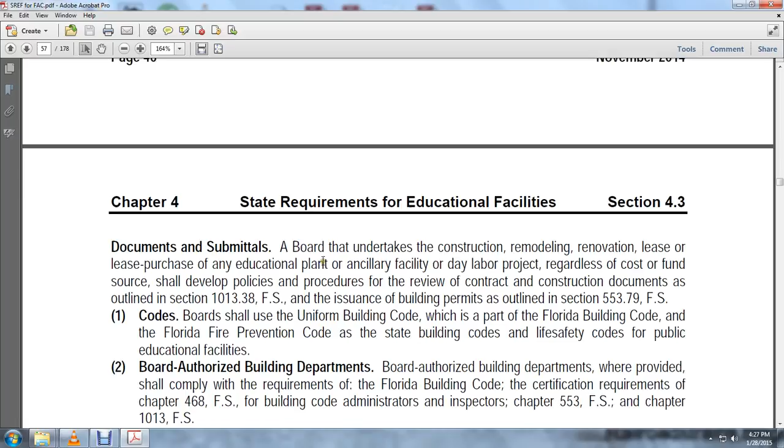Review by local fire authority. The site plan of new construction additions exceeding 2,500 square feet shall be submitted to the local county, municipality or independent fire control district for compliance review of fire department access roads, fire protection system connection locations, and fire hydrant spacing.

The site plan shall be deemed approved unless the local fire authority submits to the board's fire official a written list of deficiencies within 15 days after receipt of the site plan. Upon reasonable request from the local fire authority, the board shall provide reasonable access to all construction documents.

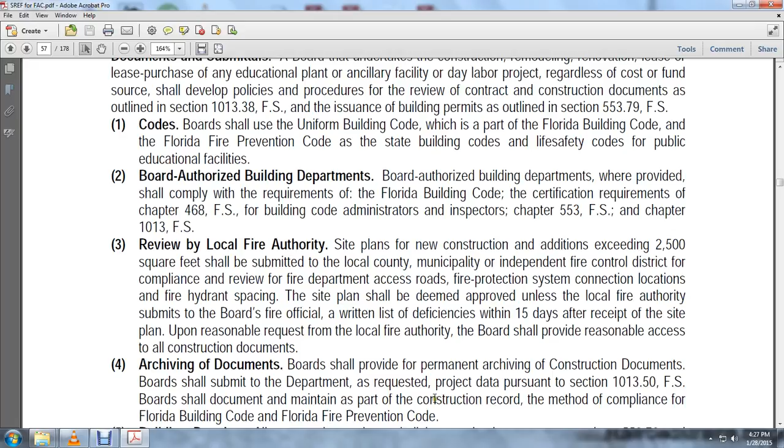Archiving the documents: the board shall provide for permanent archiving. The construction documents shall be submitted to the department as requested project data pursuant to Section 1013.50, Florida State Statutes. The board shall document and maintain, as part of the construction record, the method of compliance with the Florida Building Code and Florida Fire Prevention Code.

Building permits: all construction projects shall be permitted pursuant to Sections 553.79 and 553.80, Florida State Statutes. If the board requests the building permit from the office, the board shall comply with the following criteria. The board's designated certified fire safety inspector shall review and approve the Phase 3 construction documentation.

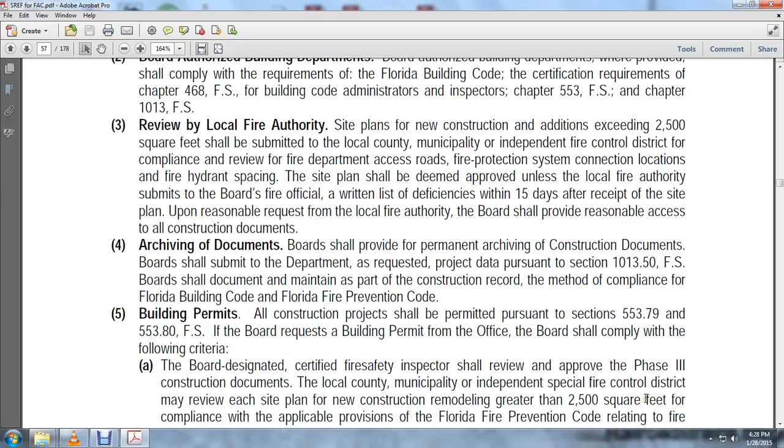The local county, municipal, or independent special fire control district may review each site plan for new construction or remodeling greater than 2,500 square feet for compliance with applicable provisions of the Florida Fire Prevention Code relating to fire department access roads, fire protection system connection locations, and fire hydrant spacing. All mandatory items cited in the Phase 3 review letter shall be corrected.

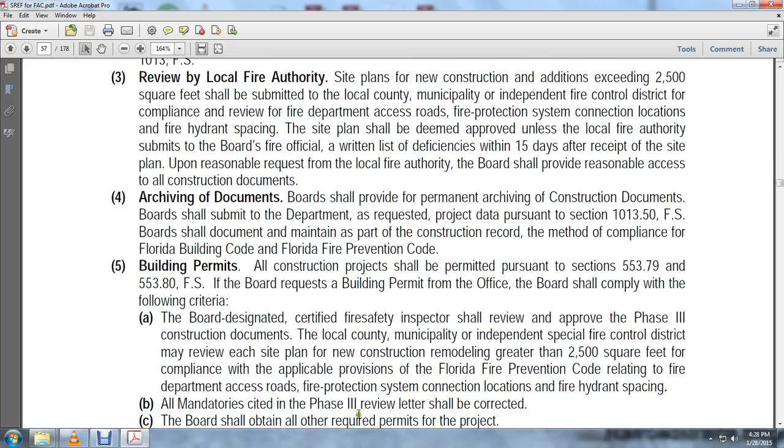The board shall obtain all other required permits for the project. The board shall verify that the contractor meets all insurance requirements and that the contractor's license is current. The board shall electronically transmit to the office, via EFIS, a completed building permit application, OEF Form 220.

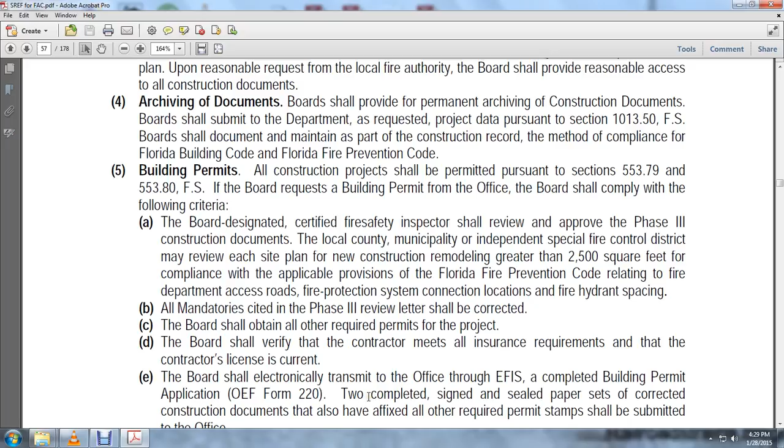Two completed, signed, and sealed paper sets of the corrected construction documentation, that also have affixed all other required permit stamps, shall be submitted to the office.

Upon receipt of the documents, verification that all mandatories have been satisfied and verification that the contractor's license is current, the office will issue the building permit.

Upon receipt of the documents, with verification that all mandatories have been satisfied and that the contractor's license is current, the office will issue the building permit, OEF Form 225.

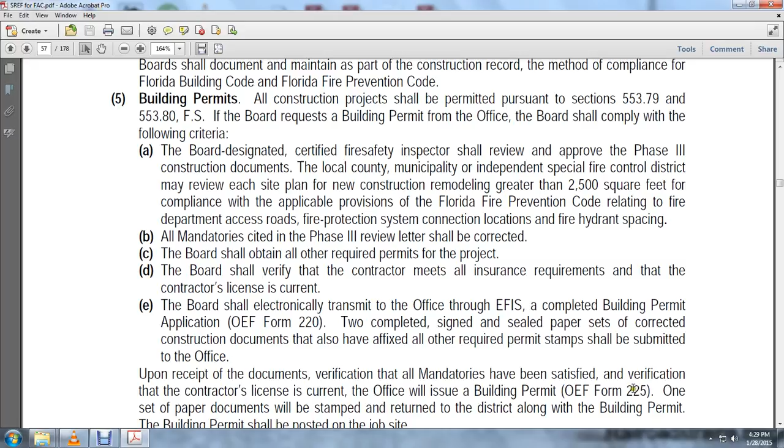One set of the stamped paper documents will be returned to the district along with the building permit. The building permit shall be posted on the job site.

Annual maintenance permit, pursuant to Section 553.80(6)(d), Florida State Statutes. The board may use an annual maintenance permit to facilitate routine maintenance work.

If the board wishes to obtain an annual maintenance permit from the office that is issuing building permits to the board, the board shall submit to the office a written request that includes a description of how the board enforces the requirements of the state, the Florida Building Code, and the Florida Fire Prevention Code for projects under the annual maintenance permit. The description must name the entity that will perform all required inspections.

The description must also explain how each project will be documented and tracked for code compliance. Upon receipt of the above information, the annual maintenance permit, OEF Form 226, will be issued to the board.

Review by office: the board may submit construction documentation to the office for review as prescribed in this section. This applies to new construction, remodeling, or renovation, regardless of the estimated project cost. Documentation for the project submitted to the office for review shall conform to the appropriate sections of the requirements of educational facilities.

Delegation of authority: pursuant to Section 1013.371(1)(c) of the Florida State Statutes, a board is authorized to adopt policies and procedures delegating authority to a superintendent or president for submitting documentation to the office for review and approval, subsequent to and consistent with the board's approved scope, time frame, funding source, and budget of the project.

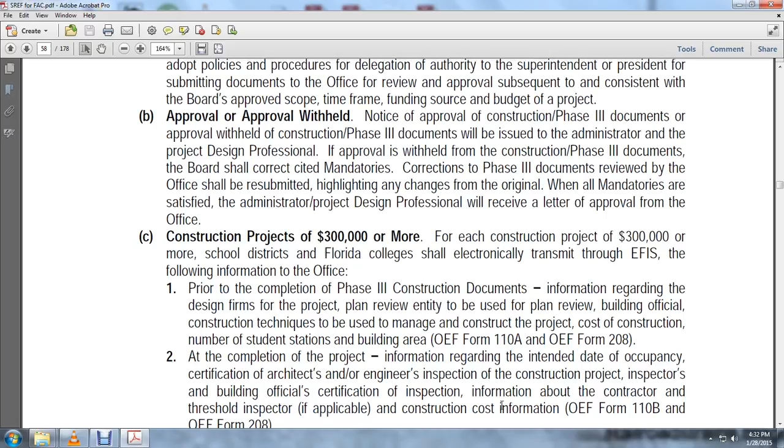At completion of the project: information regarding the intended date of occupancy certification, the architect's or engineer's inspection of the construction project, the inspector's or building official's certification of inspection, information about the contractor and threshold inspector if applicable, and construction cost information on OEF Form 110B and OEF Form 208.

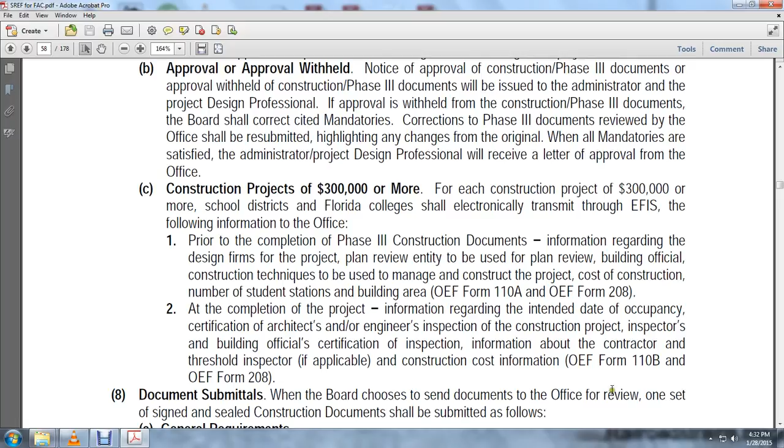Document submittals: when the board chooses to send documents to the office for review, one set of signed, sealed construction documents shall be submitted as follows.

General requirements: the letter of transmittal, OEF Form 208, and the construction documents for review shall be electronically transmitted to the office via EFIS.

Record set of signed, sealed construction documents, with statements of compliance. Only complete construction documentation signed and sealed by the design professional, in accordance with the Board of Architecture or the Professional Engineering Board, will be accepted for review.

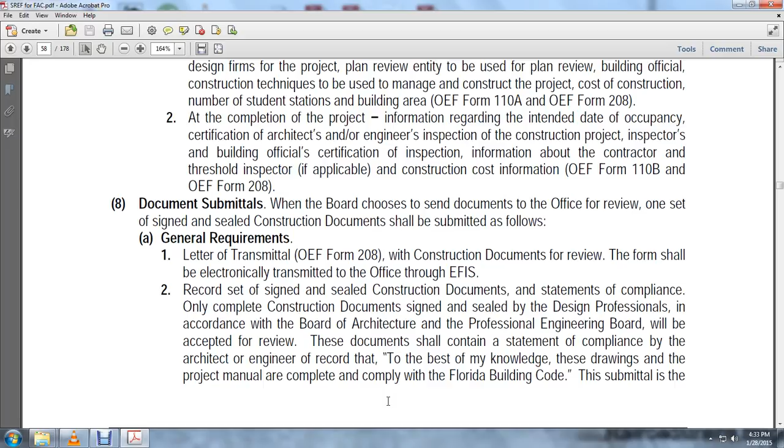These documents shall contain a statement of compliance from the architect or engineer of record, stating that to the best of their knowledge these drawings and the project manual are complete and comply with the Florida Building Code.

This submittal is the office's record set of the bid documents, which will be permanently archived by the office for the benefit of future boards.

Engineering calculations for mechanical, electrical, and structural systems: when requested by the office, the engineering calculations shall be submitted separately from the drawings and project manual.

The life cycle cost analysis: OEF Form LCCA documents, data summary sheets 1, 2, and 3. The LCCA life cycle cost analysis shall be electronically signed and electronically transmitted to the office via EFIS for review and approval.

Florida Energy Efficiency Code for Building Construction, FEEC, Chapter 13 of the Florida Building Code compliance forms.

Submit one copy of the Florida Energy Efficiency Code compliance forms, signed and sealed by the State of Florida registered design professional, including calculations for mechanical systems documentation, energy efficiency ratio rating, HVAC equipment, electrical systems, insulation, and building envelope, to the office, along with facilities space chart/net and gross square footage.

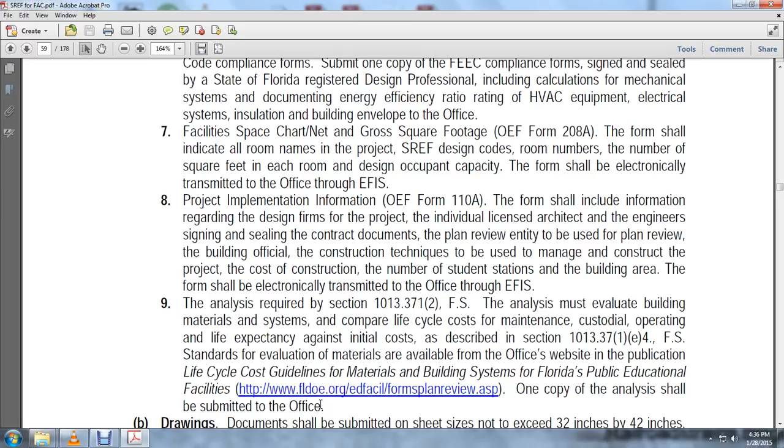One copy of the analysis should be submitted to the office. The drawing documents should be submitted on sheet sizes not exceeding 32 inches by 42 inches.

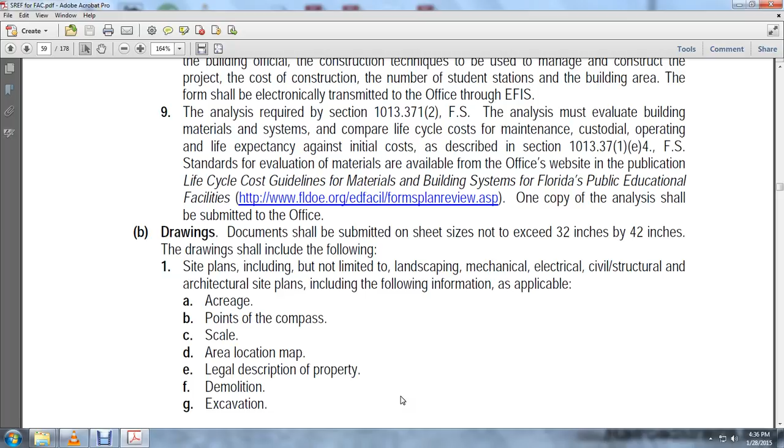The drawings shall include the following site plans, including but not limited to landscaping, mechanical, electrical, civil, structural, and architectural site plans, including the following information as applicable: acreage, point of compass, scale of the area, location map, legal description, property lines, demolition, excavation, utilities, finish grade, contours, general topographical conditions, flood zone, and floodplain elevation.

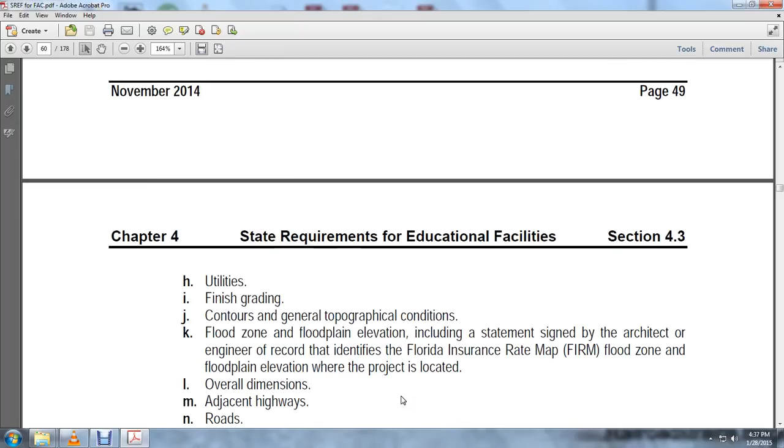This should include a statement signed by the architect or engineer, identifies the Florida insurance rate map, flood zone, and floodplain elevation where the project is located.

L, the overall dimensions. M, the adjacent highways and roads. O, the emergency access. P, the emergency fire hydrants.

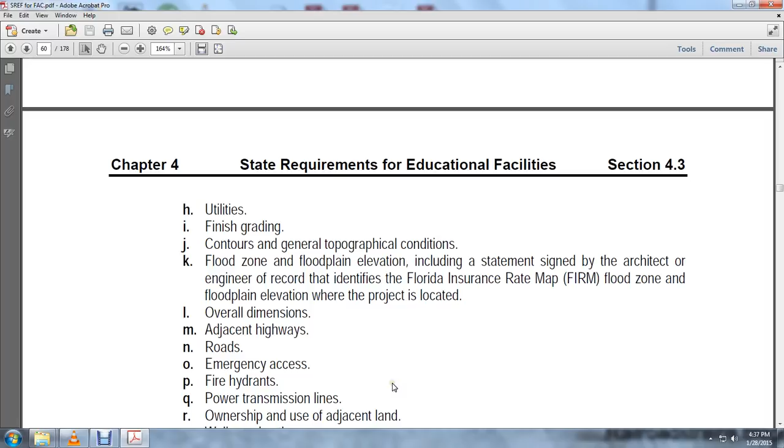Q, the power transmission lines. R, the ownership and use of the adjacent land. S, the walkway pathways. T, the vehicle and biking parking areas.

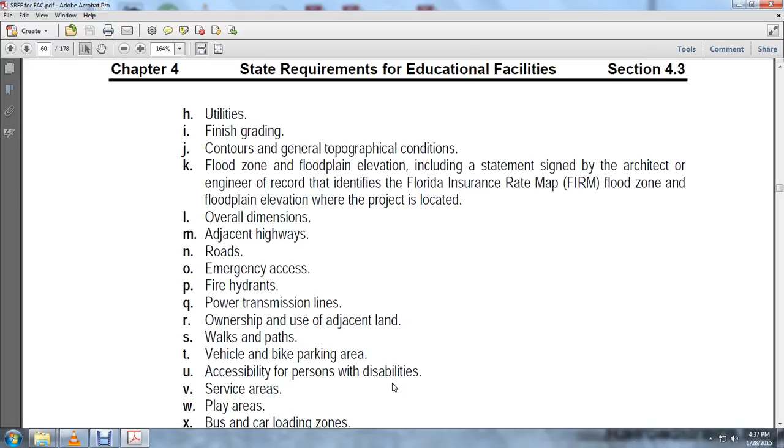U, accessibility for persons with disabilities. V, the service areas. W, the play areas. X, the bus and car loading zones.

Bus and car loading zones. Y, the existing buildings and their use. Z, the location of the proposed building, future add-ons, and AA, community use buildings.

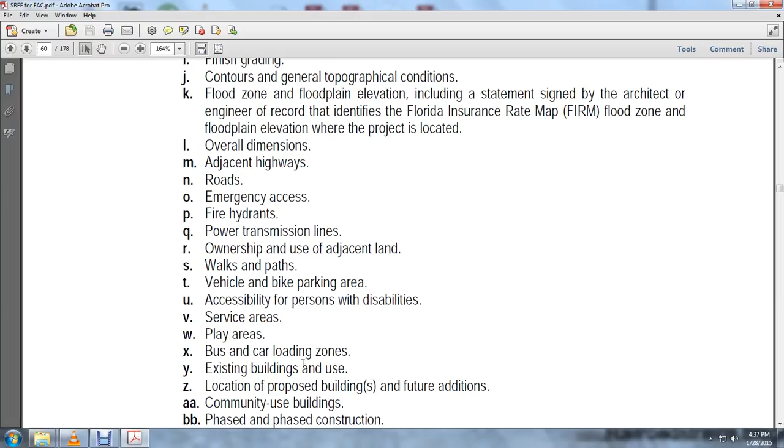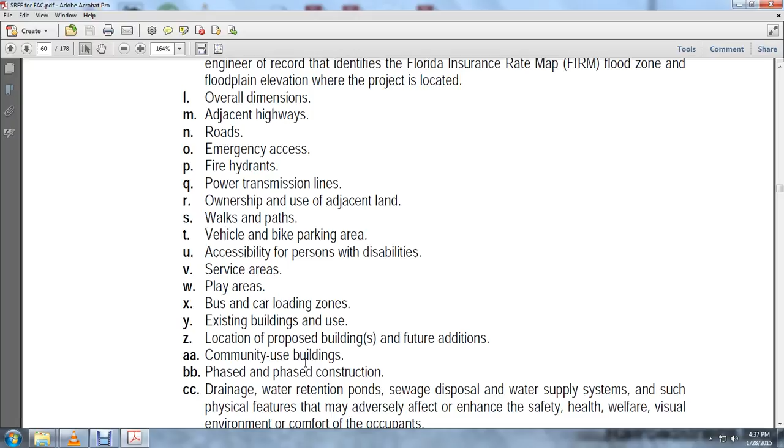B, phase construction. C, drainage and water retention ponds, sewage disposal and water supply systems, such as physical features that may adversely affect or enhance the safety, health, welfare, visual environment, and comfort of the occupants.

The plan details include, but are not limited to, title sheets, including a table of contents, statement of compliance with the architect or engineer of record for each discipline, a list of abbreviations, material indications, and notation symbols at the beginning of this section of the plan.

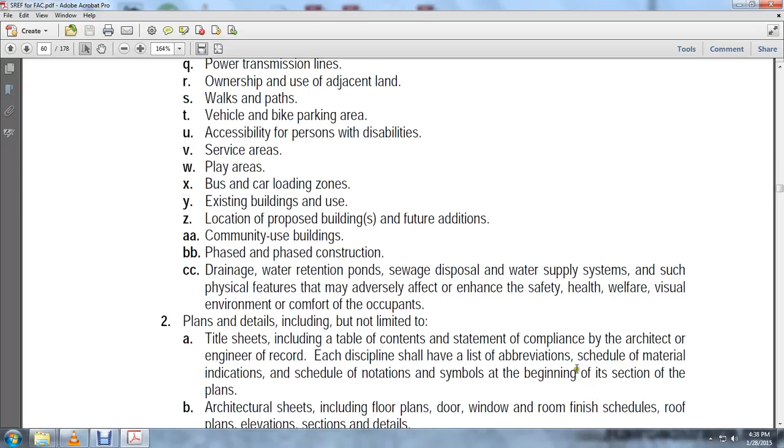Architectural sheets, including floor plans, door and window schedules, room finish schedules, roof plans, elevations, sections, and details.

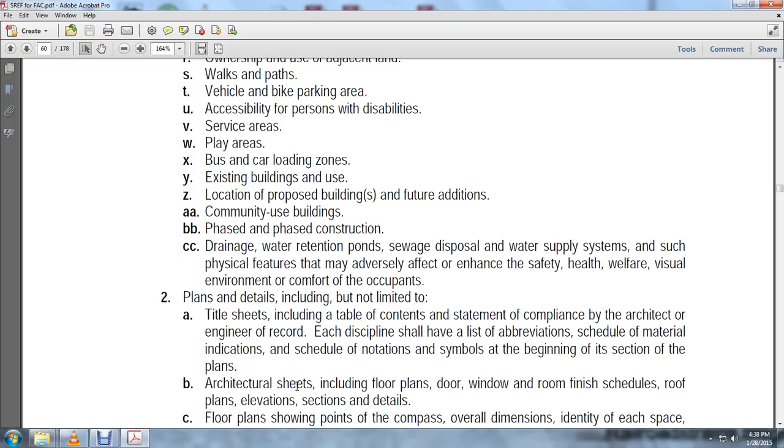Floor plans showing the point of compass, overall dimensions, identifying each space, proposed door locations, accessibility for persons with disabilities, occupant load numbers for each space, proposed passive design, low-energy usage features, and possible community service areas.

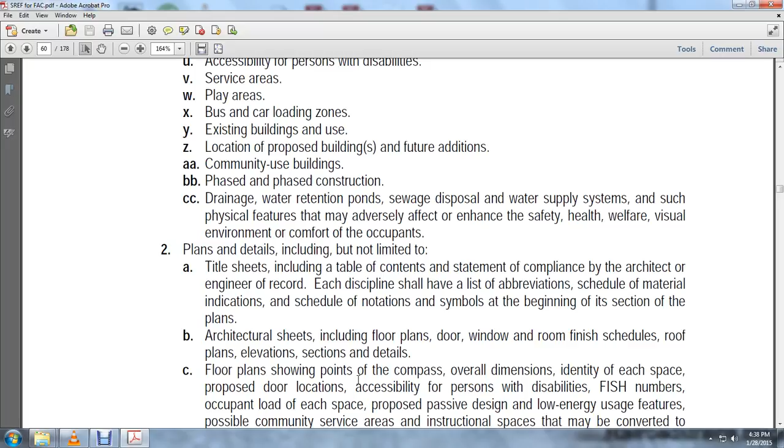Instructional spaces that may be converted to community use areas, any existing buildings or future additions, phase construction, and emergency public shelter design features, if applicable.

A life safety plan showing area occupant load for each room, means of egress, accessibility for persons with disabilities, smoke walls, fire resistant rated walls, rated doors, emergency wall openings, smoke vents, master valves, emergency disconnects, emergency lighting.

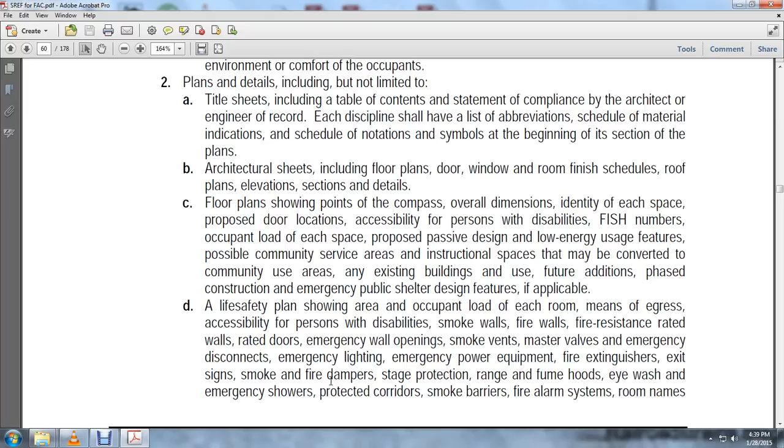Emergency power equipment, fire extinguishers, exit signs, smoke and fire dampers, stage protection, range and fume hoods, eye wash and emergency showers, protected corridors and smoke barriers, fire alarm systems, and room names.

And the FISH numbers. Any other life safety features relevant to the facility should also be shown on the life safety plan, including the fire sprinkler. If proposed. the plan shall indicate the connections and tie-ins to existing equipment by symbol.

Floor plans shall be drawn at an architectural scale that will allow the entire facility to be shown on one sheet without break lines.

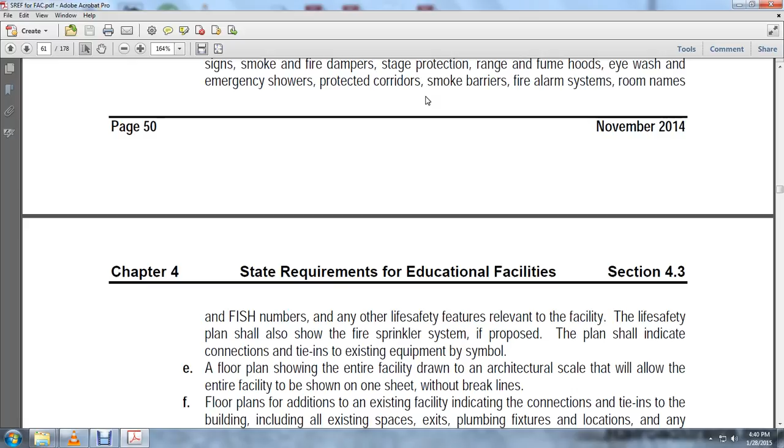Floor plans for additions to an existing facility, indicating connections and tie-ins to the building, including all existing spaces, exits, and plumbing fixture locations, and any proposed changes thereto.

The plan details shall distinguish between new and existing areas of renovation and remodeling, and any addition drawings related to accessible lifts.

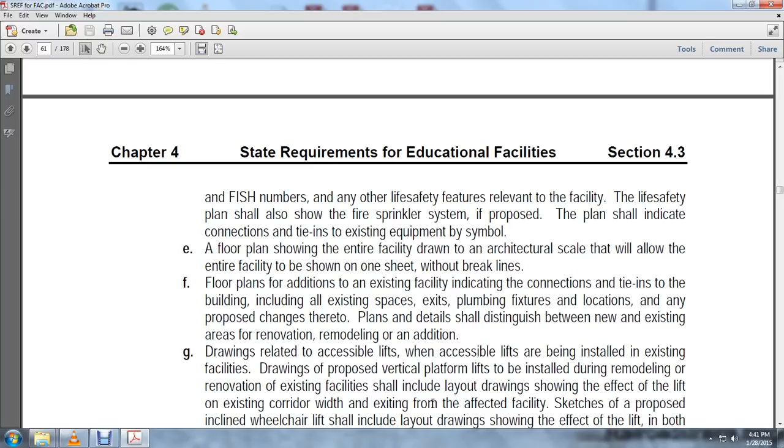When accessible lifts are being installed in existing facilities, drawings of the proposed vertical platform lifts to be installed during remodeling and renovation of existing facilities shall include layout drawings showing the effect of the lift on the existing corridor width and exiting from the affected facility. For the proposed incline wheelchair lift, include layout drawings showing the effect of the lift in both the folded and unfolded position in the stairway, with upper and lower platform storage locations and the effect on exiting the affected areas of the facility.

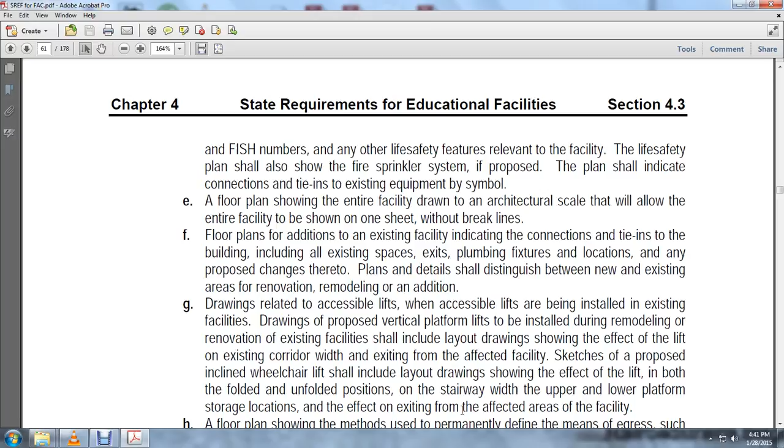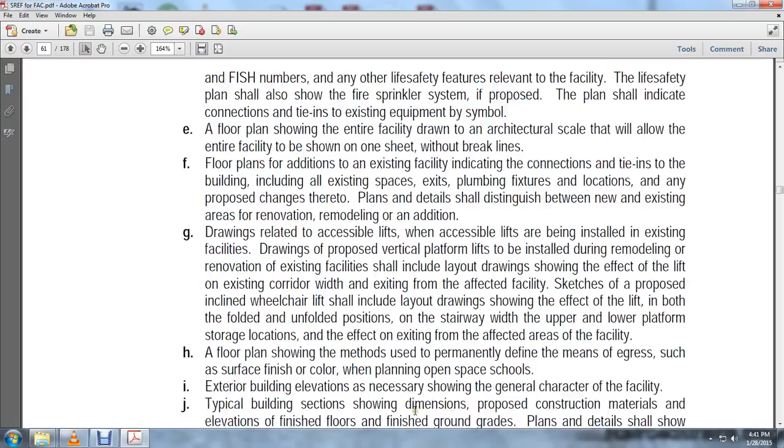A floor plan showing the methods used to permanently define the means of egress, such as surface finish or color, when planning an open space school.

Exterior building elevations as necessary, showing the general character of the facility. Typical building sections showing dimensions, proposed construction materials, elevations, finished floors, finished ground grades. Details shall show how the structural fire resistance integrity will be maintained at penetrations.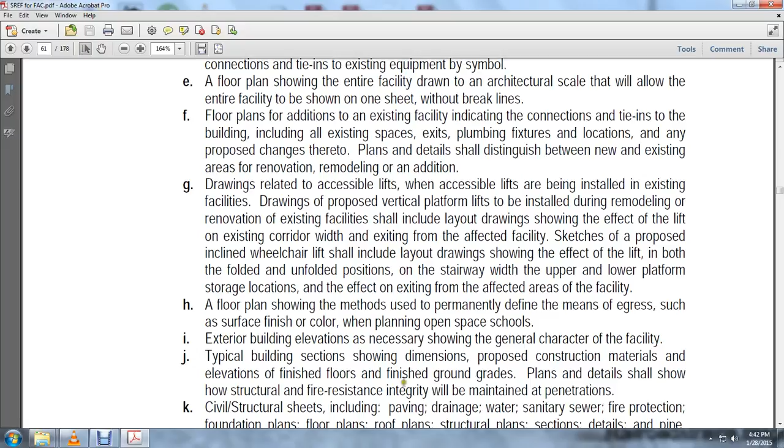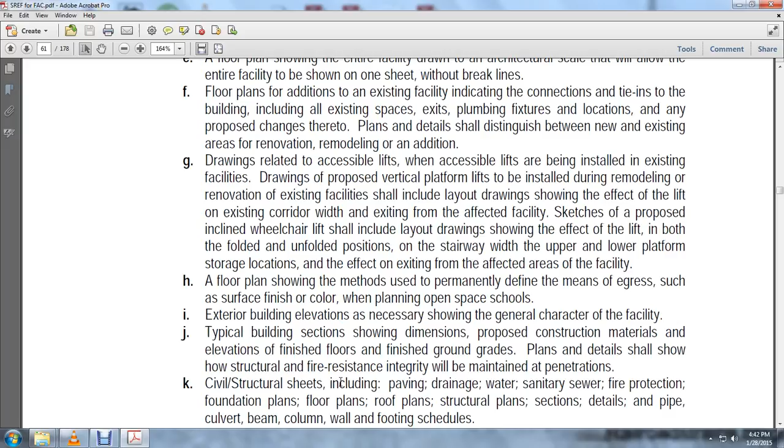Civil and structural sheets, including paving, drainage, water, sanitary sewer, fire protection, foundation plans, floor plans, roof plans, structural plans, section details, pipes, culverts, beams, columns, walls, and footing schedules.

Mechanical sheets, including floor plans, room names, FISH numbers, piping runs, section details, riser diagrams, fire sprinkler system calculations, kitchen exhaust hoods, equipment, fans, fixtures, fixture schedules, fixture locations, unit calculations, mechanical room layout, control diagrams, and equipment.

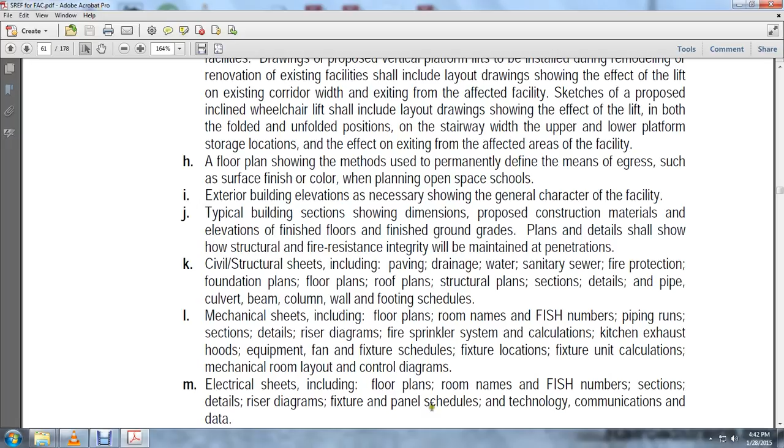Electrical sheets, including floor plans, room names and FISH numbers, sections, detailed riser diagrams, fixtures, panel schedules, technology, communications, and data. A threshold building inspection plan prepared with the architect or engineer of record as set forth in section

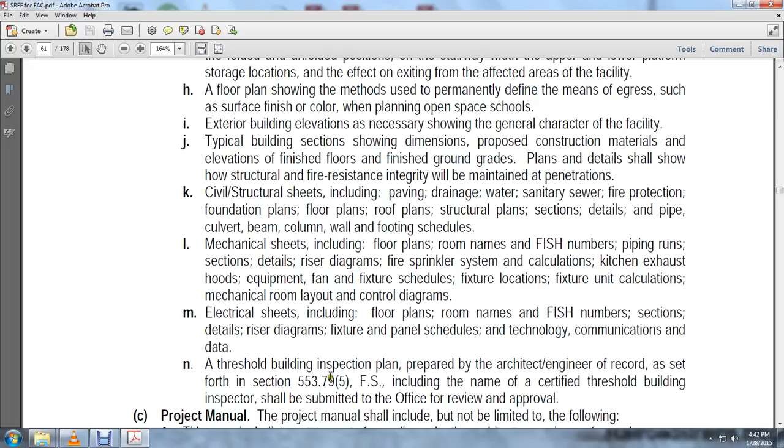553.79(5) of the Florida State Statutes, including the name of the certified threshold building inspector, shall be submitted to the office for review and approval.

C. The project manual should include, but not be limited to, the following: a title page, including the statement of compliance by the architect or engineer of record, signed and sealed; a table of contents; a schedule of the drawings; invitation to bid; advertisement for bid; time of completion of construction; instructions to bidders, including the date and time of the bid opening; notice of pre-bid conferences; sample forms; and bond requirements.

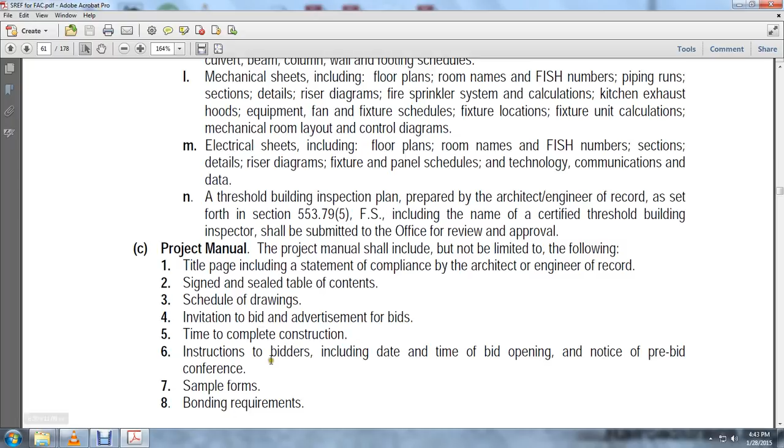9. Insurance requirements. 10. General conditions and supplementary conditions. 11. Soil test results. 12. Specifications, including requirements for materials, equipment, construction systems, standard workmanship, performance, and related services.

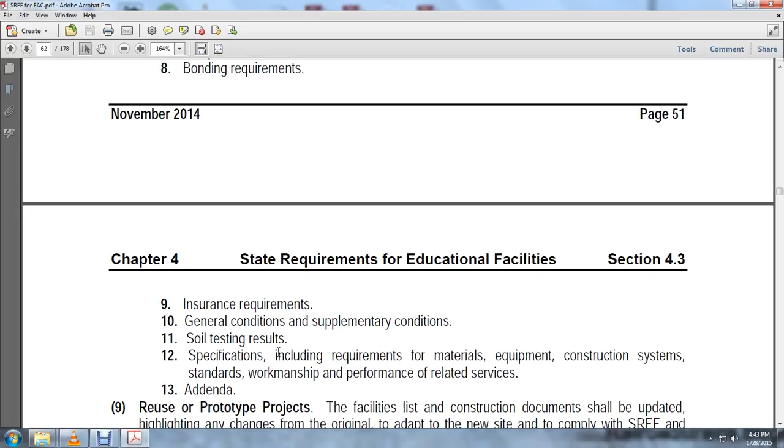9. Reuse or prototype projects. The facility's list of construction documentation shall be updated, highlighting any changes from the original to adapt to any new site, that comply with state requirements for educational facilities and current rules of the codes relating to life, safety, health, and sanitation, physical disabilities, and any laws affecting the building permit. Construction documents permitted shall comply with the Florida Building Code, the Florida Fire Prevention Code, FEEC, and the LCCA.

Life cycle cost analysis document shall also be updated to evaluate energy use through energy efficient designs. An analysis should be included evaluating the building material system, comparing the life cycle cost for maintenance, custodial, operation, and life expectancy against the initial cost.

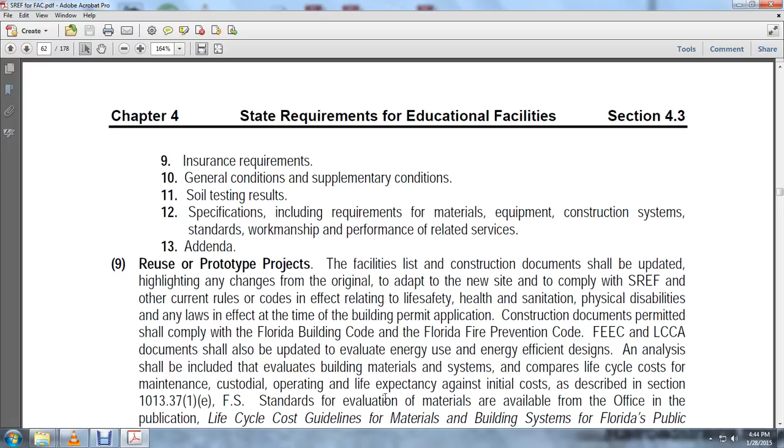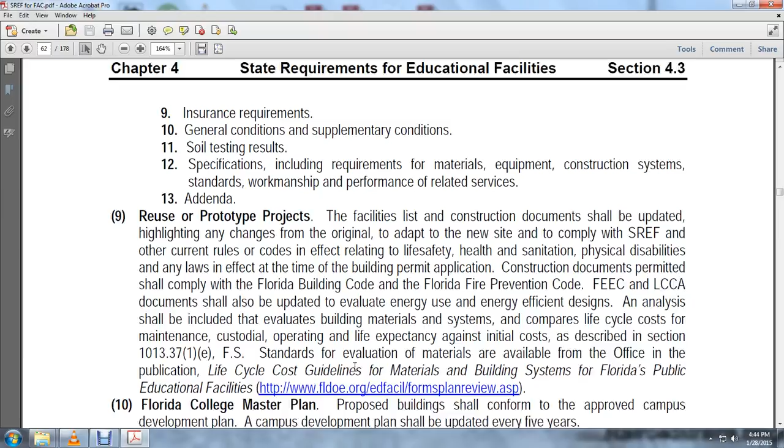The Florida College Master Plan: proposed buildings should conform to the approved campus. Proposed buildings should conform to the approved campus development plan. The campus development plan should be updated every 5 years.

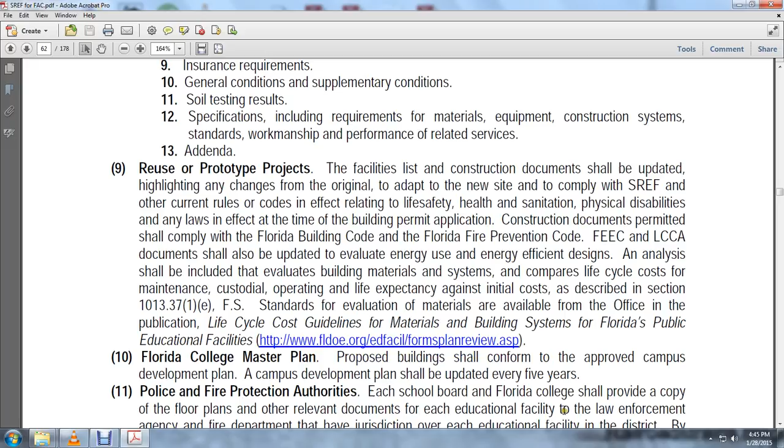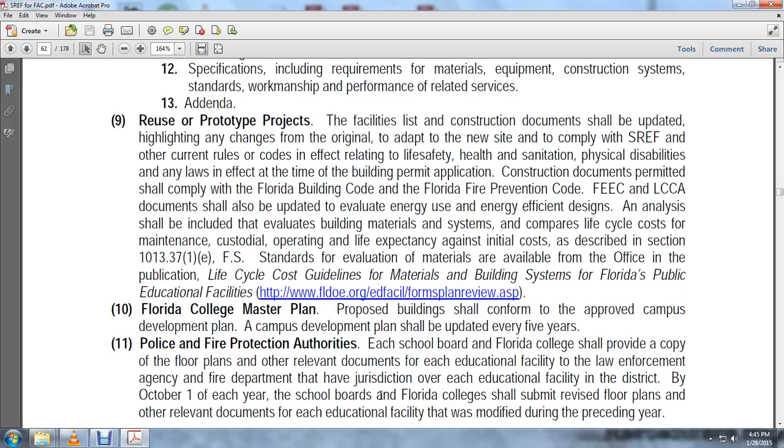Police and fire protection authorities: each school board or Florida College should provide a copy of the floor plans or other relevant documents for each of the educational facilities to law enforcement agencies and the fire department that have jurisdiction over each educational facility in the district. By October 1st of each year, the school boards or Florida College shall submit revised floor plans or other relevant documents for each educational facility that was modified during the preceding year.

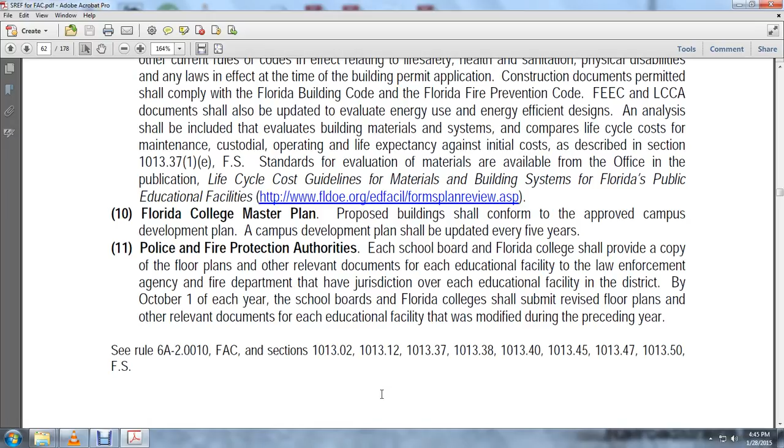See Rule 6A-2.0010, Florida Administrative Code, Section 1013.02, 1013.12, 1013.37, 1013.38, 1013.40, 1013.45, 1013.47, 1013.50, Florida State Statutes.